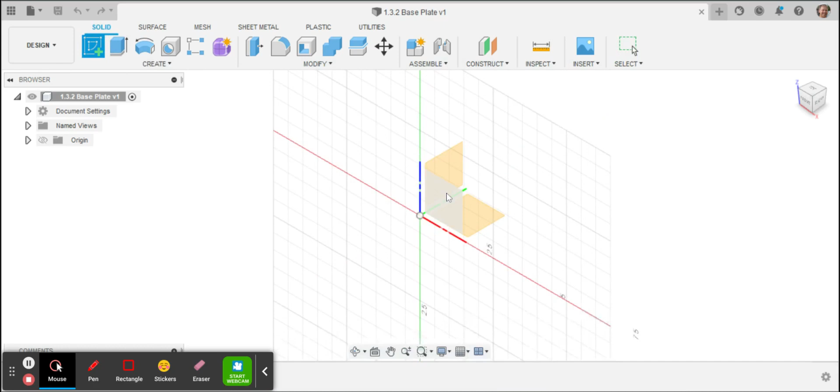We're going to start with a green plus to create the sketch. We're going to click one of these work planes. I'm going to go ahead and create a 2-point rectangle. Let's go ahead and draw the rectangle. Now make sure that your part is in inches because all of our dimensions are in inches.

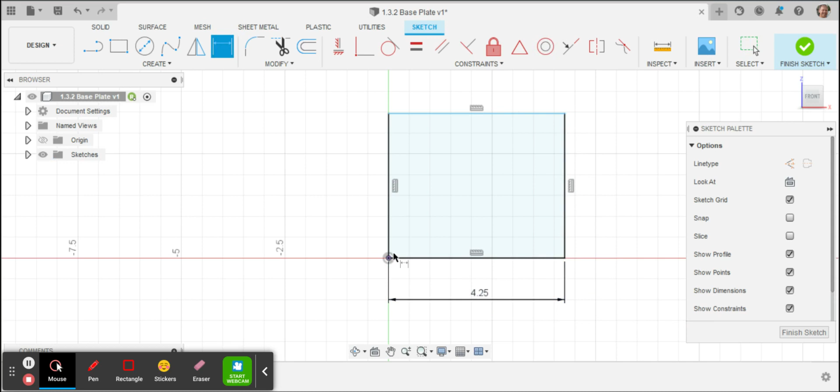Okay, the width is 4.25. Right, and the depth is also meant to be 4.25. Now we're only going to make the half of the part. So when we extrude it, we're going to do E for extrude. It says the total thickness is 0.48. We're only going to do half of it. So we're going to do 0.24.

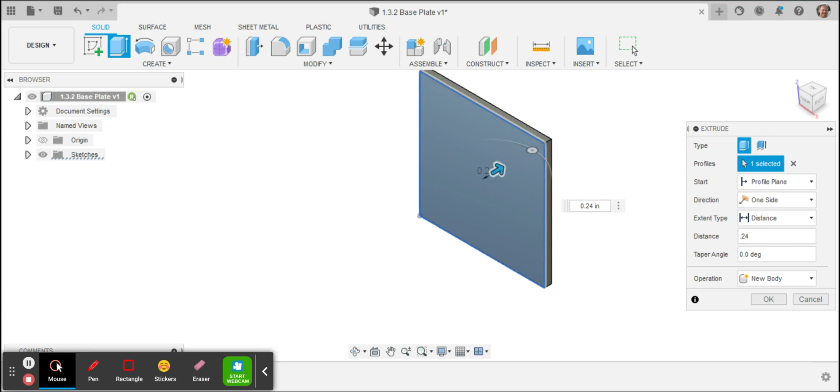Okay. All right. And then now let's go ahead. We're going to make a new sketch. Right click and create sketch. Now, first, in the paper that you guys measured all of your dimensions on, the square is at the bottom left, so I'm going to go ahead and draw that square. I'm going to do D for dimension.

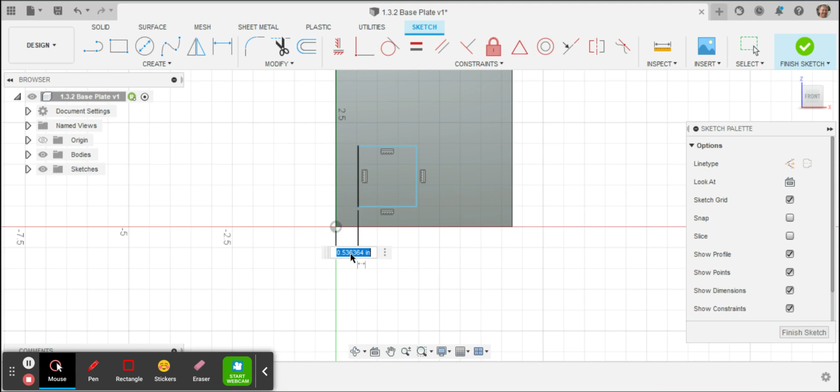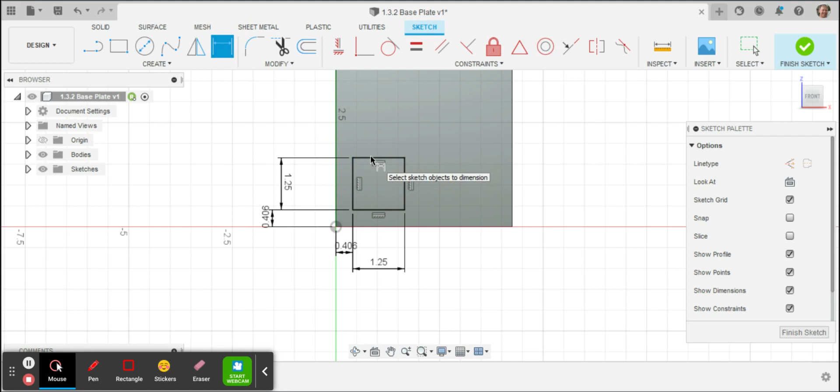The left edge of the square is 0.406 from the left edge. And the bottom of it is 0.406 from the bottom edge. 0.406. And the width of it is going to be 1¼ inches. So this one is 1.25. This one is also 1.25. Notice after it's fully dimensioned, all four of those lines of the square are black.

Okay. Now I'm going to do extrude, and I'm going to click that square, and it's going out. I want to go in. So notice it goes to cut, and I'm going to change the extent type from distance to all, so it goes through the whole part. We click OK. There we go.

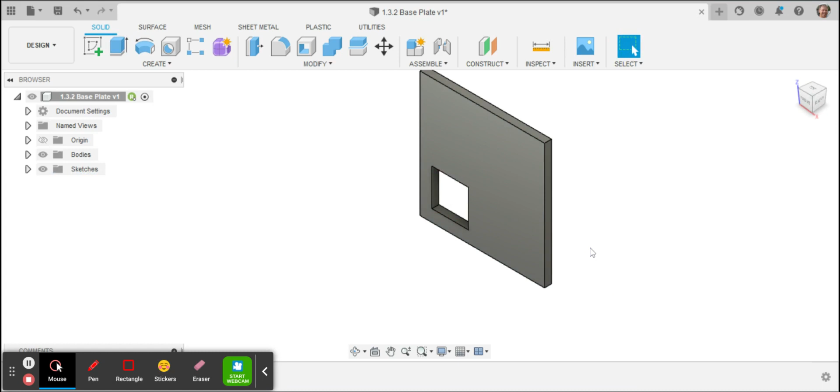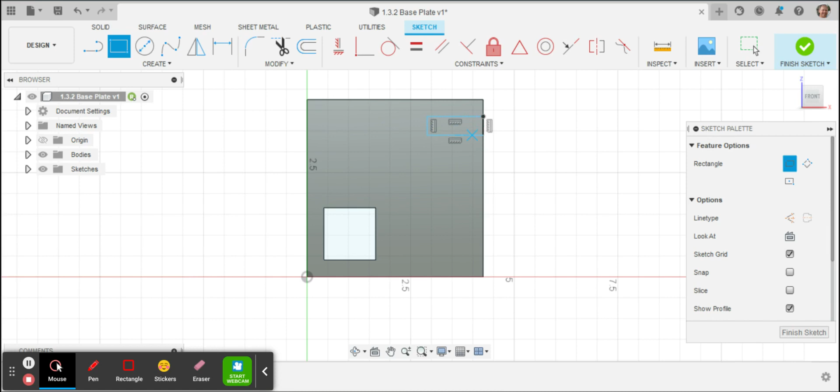So next, I'm going to go ahead and right-click and make a new sketch again. Create sketch. And I'm going to make this rectangle notch up here at the top right. Okay. The width of it is 1.75 inches, so D for dimension. This is 1.75. And the thickness is 0.5.

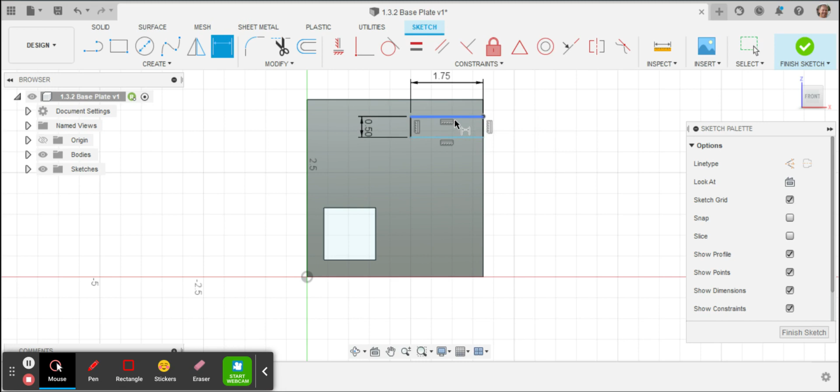Notice how these two are blue. Okay, and this one's black. Once I've dimensioned everything, you'll notice it should all go black. The width of it is 0.5. There we go. And now the next thing I need to do is make sure from here down to the bottom is 3.25. So 3.25.

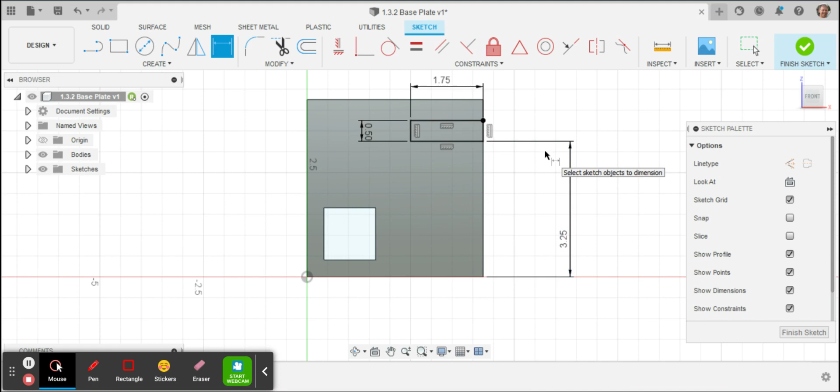There we go. Now I'm going to hit E for extrude, and I'm going to click on that, and it's going out. I need to go in the other direction. I'm going to change it from distance to all, so it cuts through the whole part, and we click OK. Okay, so that's done. Now I'm going to right-click and make a new sketch. Actually, I'll just click on this zoom, so it automatically fits to the screen.

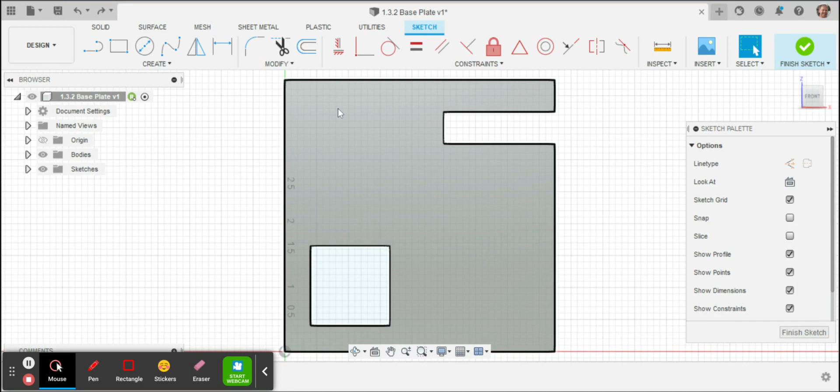Now, if you notice at the top left, there are 4 holes. So I'm going to make one of those first. I'm going to click the down arrow where it says create, and I'm going to click on point, and I'm going to set the one at the top left. Now I'm going to hit D for dimension. From that point to the left edge is 0.406. So I'm going to set that to be 0.406.

Now from that point to the bottom is 3.875. So I'm going to dimension from here to the bottom down here, 3.875.

Okay, so the next thing I'm going to do is take that hole and create a rectangular pattern. So I'm going to click on this down arrow under create, and I'm going to choose rectangular pattern. Now the first thing shown up here is this blue box. The select is chosen, so I'm going to select the thing that I'm going to pattern. So I'm going to pattern the hole. So I click on the hole.

Okay. Now it's trying to do it in the right direction. How far is it supposed to be in the right direction? Instead of 3 of them, it's supposed to do 2 of them because I want 2 holes, because there's 4 at the top left. And the distance left to right is supposed to be 1.25. Let's see, is it? No, it's 1.5 minus 0.375. So 1.5 minus 0.375. Okay. So that created another hole from left to right.

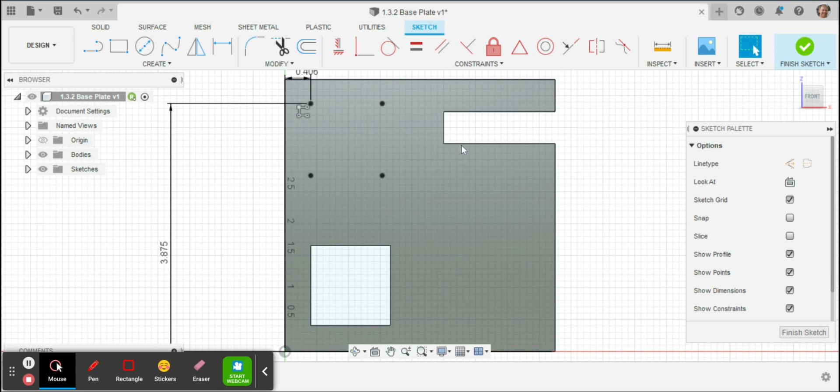I guess it's going to be a negative 3.875 plus 2.75. There we go. Okay. All right. And then we click OK. All right. So we just made those 4 holes. Or we made points for those 4 holes.

We're going to do another rectangular pattern down here at the bottom, right? Because there's 4 of them again. So I'm going to go ahead and click on create, and I'm going to click on point. And I'm going to do the one kind of at the top left. Don't let it line up with the top of the square because that could be a problem. I'm going to deliberately not let it line up with that.

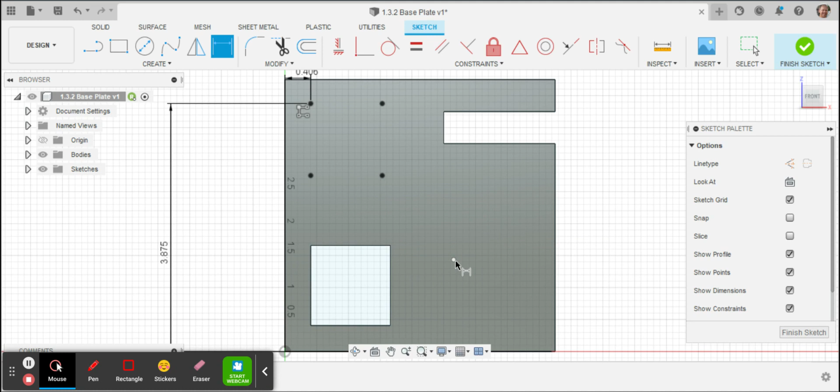Now the dimension, in this case, I'm going to do D for dimension. The top left to the left edge is supposed to be 2.75. So I'm going to set that to be 2.75. Good. And now from the hole down to the bottom edge is 1.5. So I'm going to set that to be 1.5.

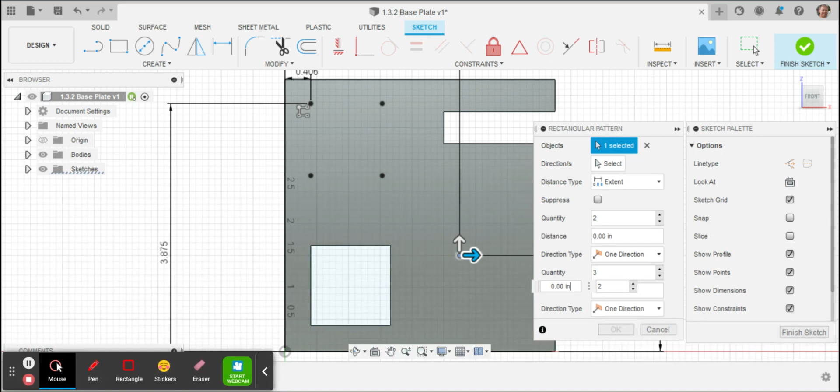Okay. Now under create, I'm going to choose the down arrow and create a rectangular pattern again. And I'm going to pattern this hole. In the right direction, instead of 3, it's going to be 2. And how far is it supposed to be? It's supposed to be 3.875 minus 2.75. So let me enter that. 3.875 minus 2.75. Okay. Now that's done in the right direction.

Now I need to take the up arrow and make that go down. And I'm going to change that to 2 because we're going to do 2 holes in the Y direction. And again, notice it's negative. Now the distance is 1.5 minus 0.375. So I'm going to make sure it's negative: negative, open parentheses, 1.5 minus 0.375, close parentheses. Now we click OK.

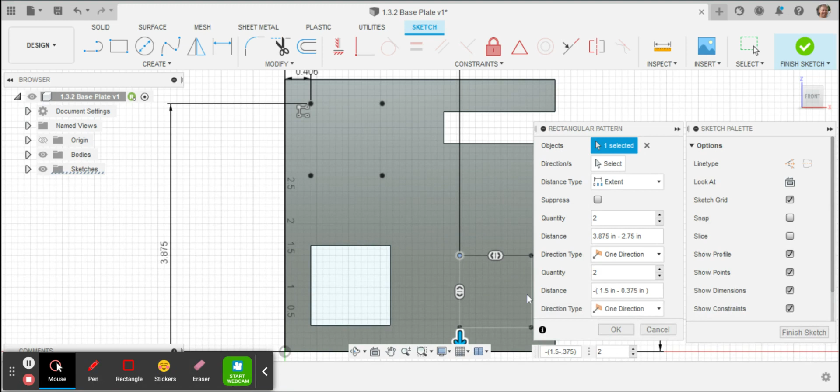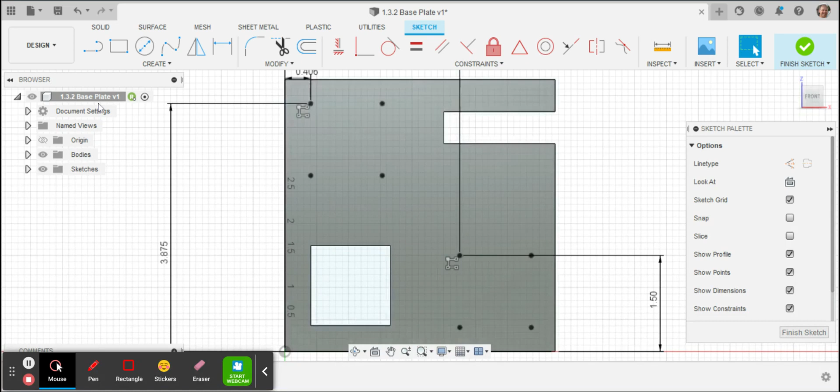Okay, good. So now we've got these 4 points at the top left and these 4 points at the bottom. Now I need to make the holes. This hole up here and this hole at the top left are both the same size. I measured them both as being 0.23. So I'm going to make those first. I'm going to finish sketch, click on hole, and choose only those 2 because they're the same size. And instead of the extent being distance, it's going to be all.

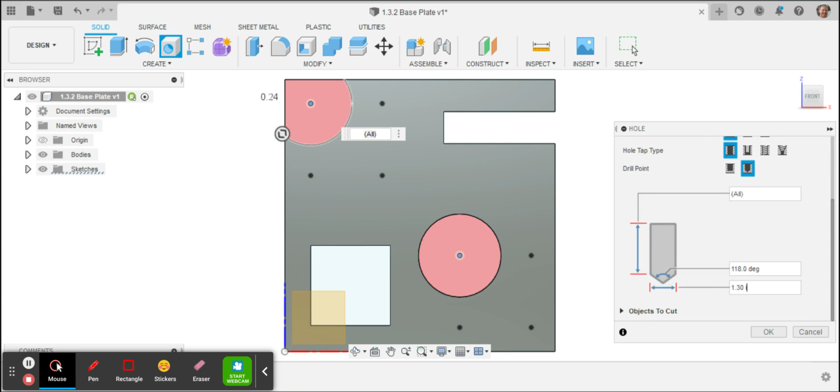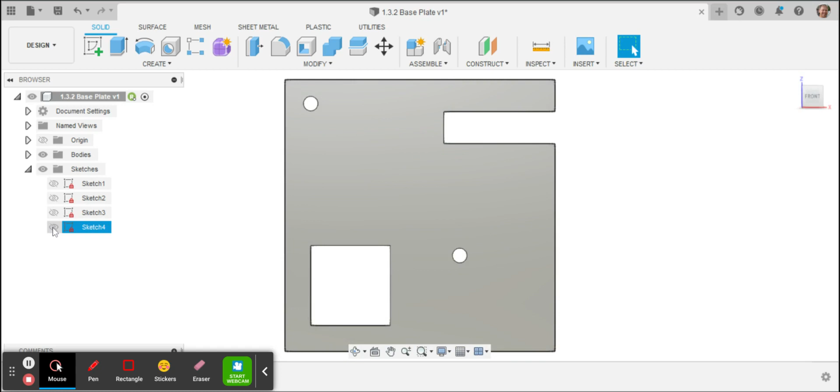Now I need to set the diameter. So I'm going to scroll down until I can see the diameter. The diameter I measured as 0.23. There we go. Notice it makes both of those holes the exact same size. Now you'll notice that we can't see the other points. So I'm going to get those points back. I'm going to click on the arrow next to sketches and click on the most recent sketch. Sketch 4 is the one with the holes on the bottom. So I'm going to click on that eyeball. Now I can see all the rest of those holes again.

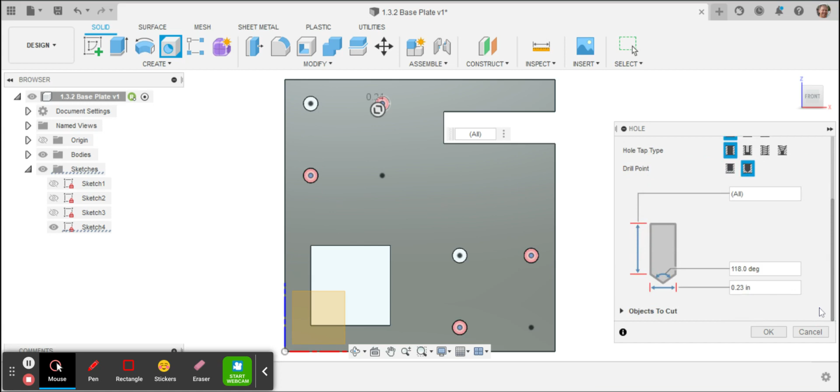The next holes, this one at the top right, this one at the bottom left, and the others at the bottom left and top right, are all going to be the same size. So I'm going to click on hole and choose the top right, the bottom left, the top right, and the bottom left. Change the distance to all. I need to scroll down, and the diameter I measured them all to be the same, 0.177. And now we click OK. All right, so those 4 holes are done.

Now these last 2 holes that are left are going to be the same size as well. I'm going to click on create, and click on this one at the bottom right and this one at the bottom right, and we're going to change that from distance to all. Now I'm going to scroll down and set the diameter. I measured them both as 0.191. Okay, that one's done.

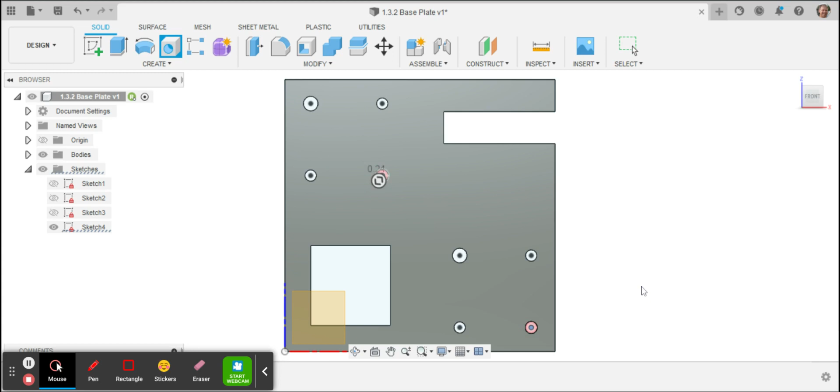Now there's one other hole, and this is a different size. I don't need to see sketch 4, so I'm going to click on the eyeball to hide that sketch. And I'm going to make a new sketch, so I'm going to right-click on the face and create sketch. Now I'm going to do create, point. This hole is kind of right around there. And I'm going to dimension from this point way on the bottom.

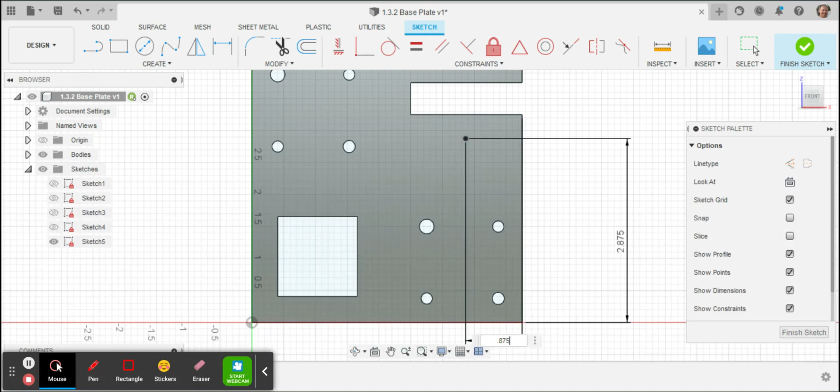Okay, let me correct that. This one is 2.875. That's better. And then from this point to the right edge, oops, I got to do D for dimension. From this point to the right edge, there we go, is going to be 0.875. All right, and now I'm done with that sketch.

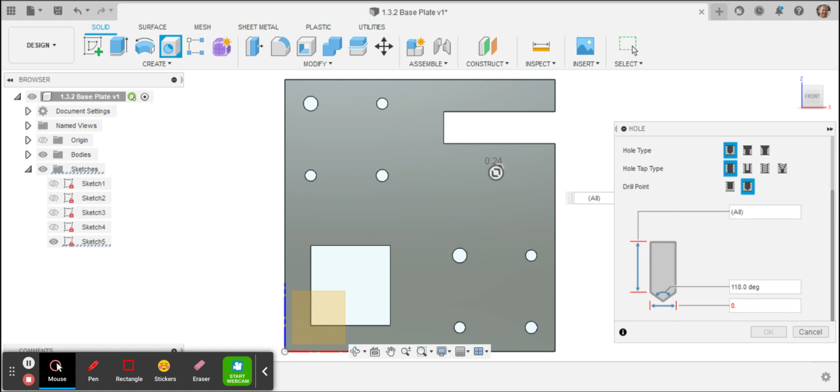So I'm going to finish sketch, then click on hole and click that. We're going to set the last hole, and this hole I measured the diameter as 0.2. So we're going to set the distance to all, scroll down, and set the diameter to 0.2. There we go. Okay, so that's how to make the base plate for activity 132. Let me go ahead and save it, make sure that it's saved.